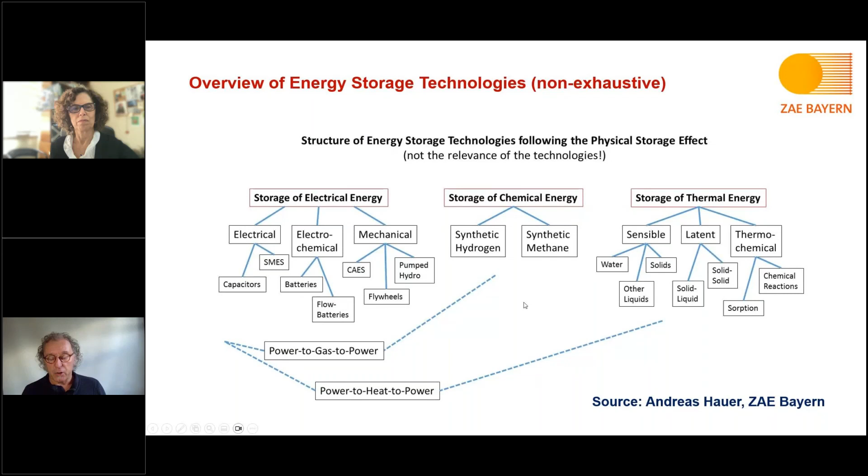Then we have latent heat, in which most of the heat is stored in a phase change. It can be either melting but also evaporation of a substance. Water can be used, so the ice to liquid water transfer has been used widely. And then also organic and inorganic PCMs are on the market for phase change thermal storage.

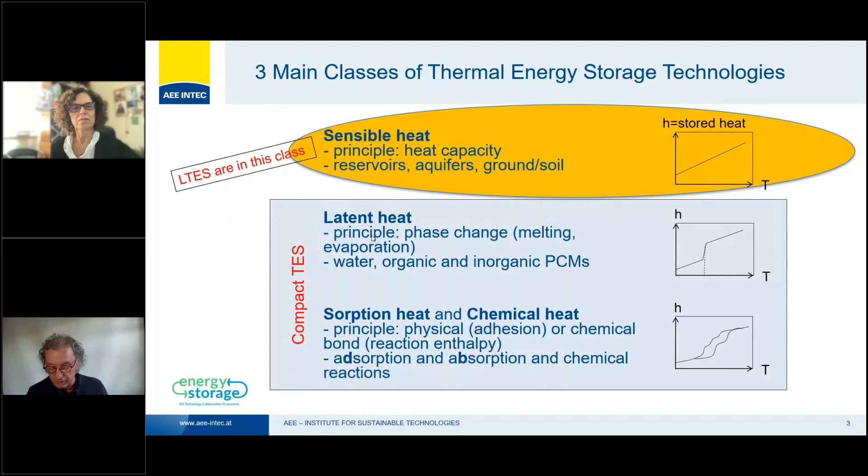The third class is sorption heat and chemical heat. We call it thermochemical materials. It can be either a physical principle in which molecules adhere to a surface or to each other in liquids, or a chemical bond with a chemical reaction or a redox reaction. We call the latter two classes compact thermal energy, but for large thermal energy storages, we will look at the principle of sensible heat. So mostly it will be water or sand that is used for storing heat.

The pit thermal energy storage is a pit, a hole dug in the ground, and then the earth that is dug out of the ground is being used to create the sidewalls. And then everything is topped with an insulating top layer. And then there are inlet and outlet devices to exchange the water with the heat exchanger connected to the system.

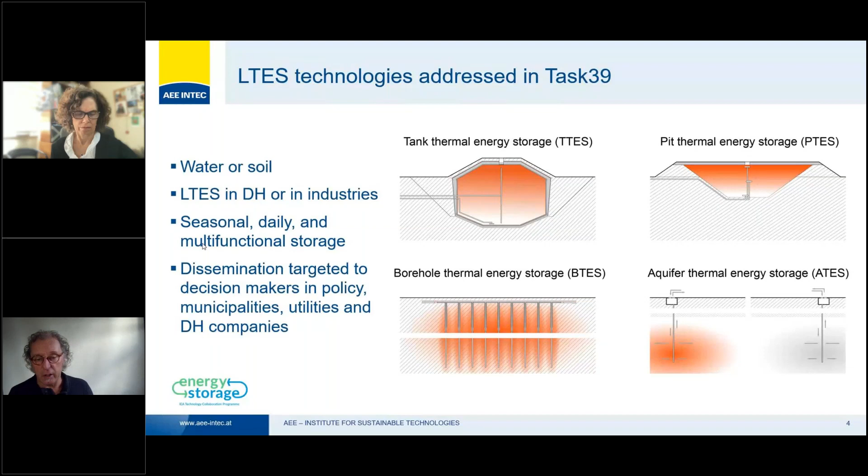What is our definition of large? When talking about large, we talk about 1 gigawatt hour per year, meaning that if you have a seasonal storage, it will be a large storage that has this discharge and charge one time per year. If you have a weekly storage, then it will be a smaller storage, say about 30,000 cubic meters or so, that will discharge 50 times. And another aspect of the scope is that the stored heat should be suited for discharging into district heating networks, so of temperatures between 50 and 100 degrees roughly.

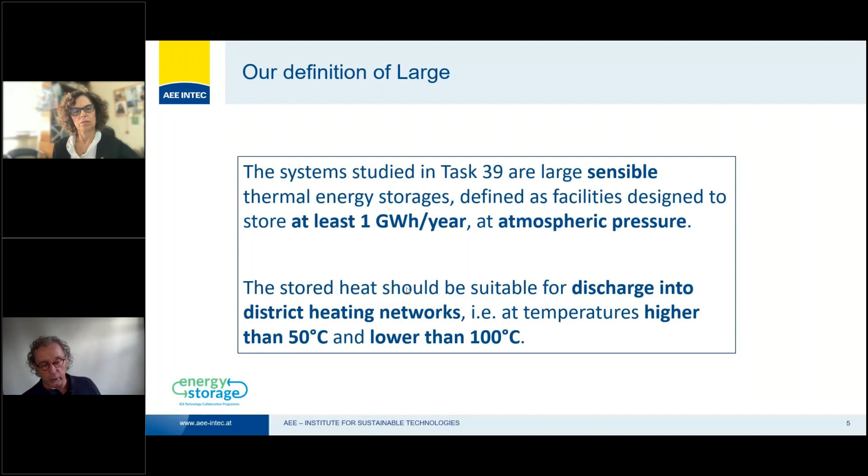Why do we need large thermal energy storages? Because energy storages can provide flexibility, and they enable a large uptake of renewable heat sources, sources that have a great variation throughout the year. Examples of the last two are, for instance, solar thermal heat and deep geothermal heat.

But a large thermal energy storage also can be used for power to heat in times where electricity is very cheap, so that this electricity from wind turbines or PV panels or other renewable sources is stored sustainably in an LTES through a combination of a heat pump or directly. And then, of course, there are other sources for the LTES storage: biomass, CHP, centralized or decentralized, or industrial waste heat, or large heat pump installations in industry.

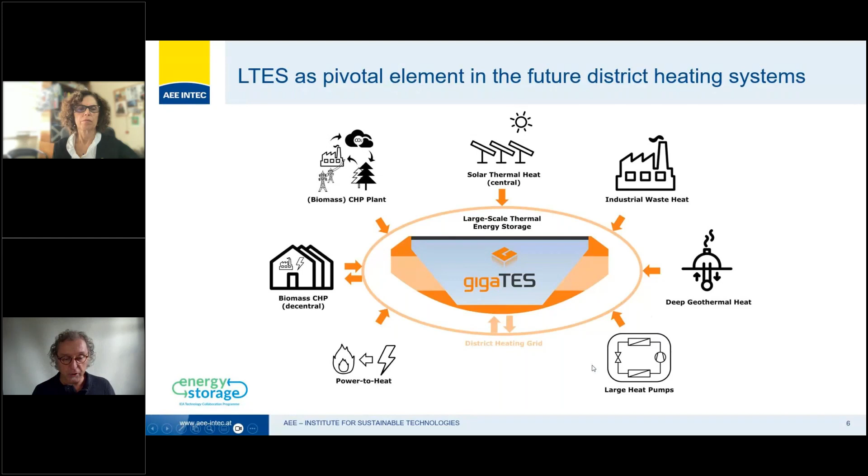What is the potential of pit thermal energy storage for district heating in Europe? For a European project, we did a first estimate of the potential in Europe. The basis for that was that in 2018, there was a total final energy consumption through district heating systems of 446 terawatt hours.

If we assume that 40% of the needed storage technologies are pit thermal energy storage, and that 30% of the annual heat sales should be stored in the storage to be used in winter, for instance, then presently we would need a pit thermal energy storage capacity for district heating of about 54,000 gigawatt hours, meaning 54 terawatt hours.

If we assume that there is a fourfold growth of district heating until 2050, which is also in most of the plans of the national policies, then we would arrive in 2050 at about 220,000 gigawatt hours, meaning that there will be an exponential growth of the pit thermal energy storage systems in Europe. You will see more about this later in the presentation.

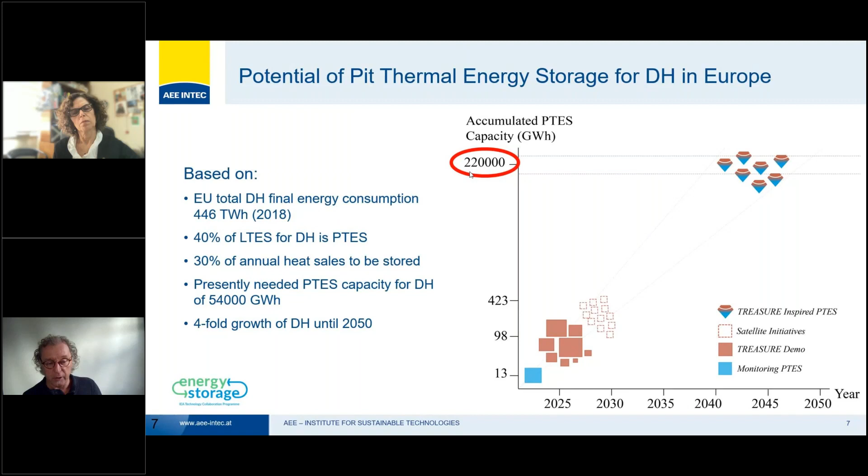So what is working in IEA tasks all about? It's working together with experts all around the world. These experts collaborate on a common work plan. So we have a work plan, and the work is being done by the experts, but all experts have to bring their own funding, meaning that there's no central funding for the projects, but it's decentralized through national or international funding of the experts.

So starting with the work plan, we started the kickoff of Task 39 in October 2020. Then every 6 months we had an expert meeting. Because of COVID, the first 3 were online, and we had a first physical meeting in Graz in 2022. There were 2 meetings that were connected to a technical tour to a pit thermal energy storage installation.

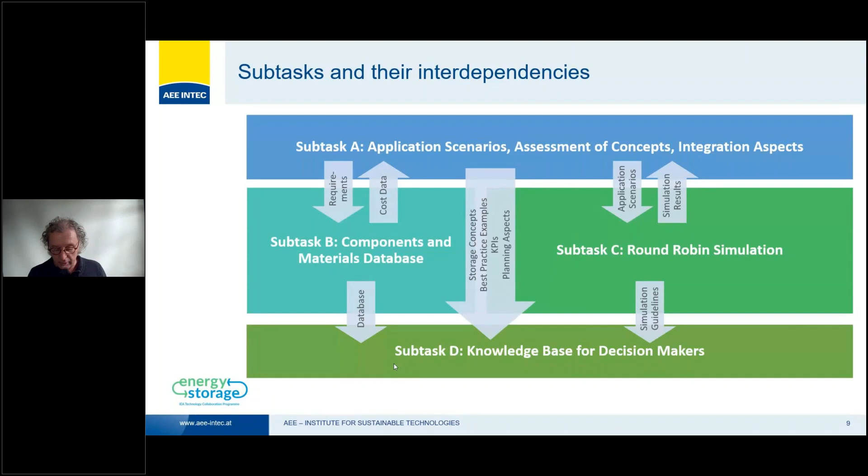In the next 4 slides, you will see some of the results of the task. The task has almost ended, and most of the deliverables will become available in the next month. If we look into subtask A, it's also working on a key performance indicators list. And we define key performance indicators in order to have a better view on the quality and the challenges and barriers connected to different heat storage technologies.

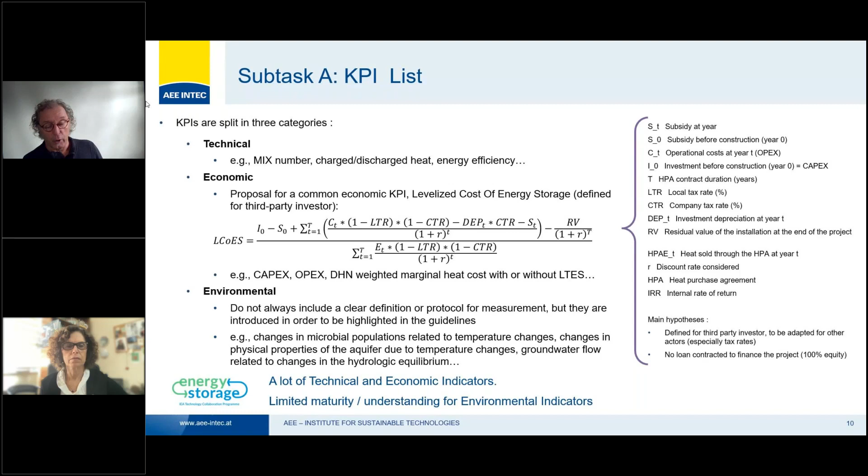We split the KPIs into 3 categories. The first category is the technical one. So for instance, what is the power for charging and discharging? What is the efficiency of the storage over certain periods? What is the exergetic efficiency, for instance, the MIX number, and other technical performance indicators.

Then we also look at economic performance indicators, for instance, the investment cost, the financing cost, but also the levelized cost of energy storage. So what does a kilowatt hour of stored energy cost to the end user? And then, of course, CAPEX, OPEX, and marginal cost are also key performance indicators of the thermal energy storage.

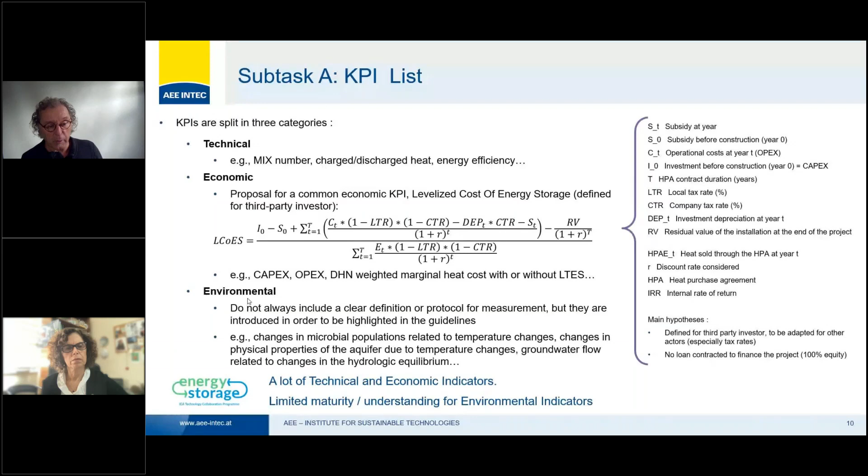And the third category is the environmental performance indicators. But the problem here is that they do not always include a clear definition or a protocol for the measurement. So this is one of the challenges for the group, also for the follow-up, in order to come up with clear protocols on how to define environmental performance indicators.

Then we have subtask B on materials database and material test.

One of the aspects is that we work on a database, and what we have structured now is that we have 3 technologies from which you can select. It's the pit storage, the borehole storage, and the aquifer storage. And from these storages, you can select a component. Here, the example is a component of the pit storage. And these components for the pit storage are either soil, protection, tightness, the water, and the thermal insulation.

And here we chose the soil, and from the soil you can choose the different types of soil. And then from this different type, you can find the different thermal properties or also structural properties of this element. With this, we have a database that will enable engineers to make a proper modeling of the different aspects of a thermal energy storage.

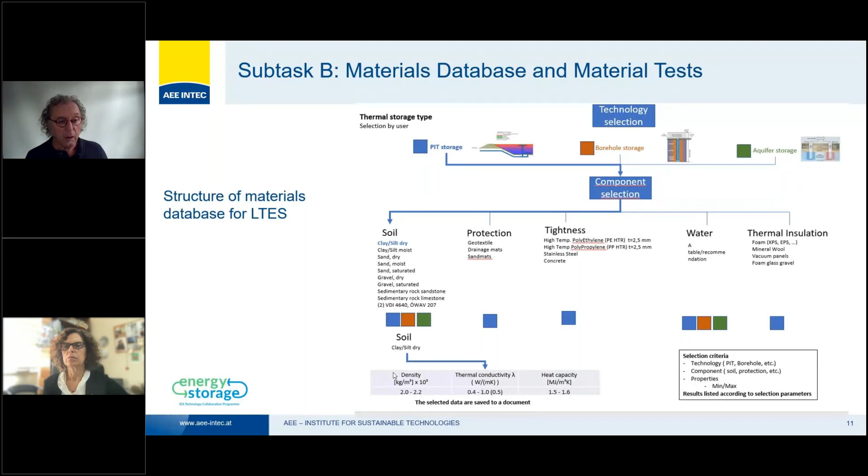Then we have subtask C on round-robin simulation. What we did there is we had a large group of experts that are calculating the performance of large thermal energy storage, and we divided the group into 6 applications. So there's one application for underground tank thermal energy storage with 100,000 cubic meter water volume. The other one is the above ground tank. It's a steel tank with 50,000 cubic meters.

Then there's a pit thermal energy storage with a conical form, and a pit thermal energy storage with a pyramidical form. And then there's one aquifer thermal energy storage and one borehole thermal energy storage. And the idea is that all the experts with their software simulate a year of charging and discharging the storage in a seasonal setting. So 3 months charging, 1 month waiting, and then 3 months discharging. And this is a so-called simplified load profile.

And then the experts compare to each other the results of the calculation and try to find out where the differences come from, and make the protocol of the simulation and the values of the boundary conditions in such a way that the outcomes of the different software are as identical as possible.

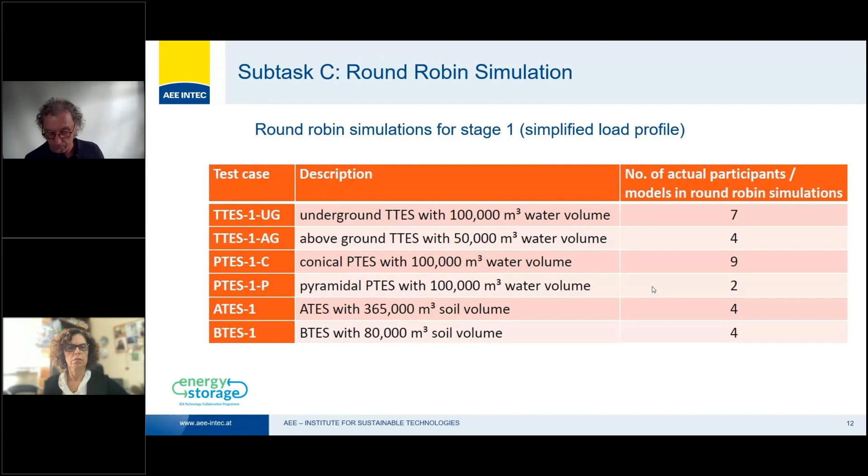Then we have subtask D, working on a knowledge base for decision makers. We introduced leaflets. They are almost ready with information material. You will see more examples of these leaflets soon. And then we have the Task 39 webinar, this one for instance, and we have policy workshops, one on the 5th of December. It will be an online workshop with the question, are large thermal energy storages a key element of the future energy system? The form of the workshop is as follows.

We have a panel of national energy agencies that will give a short introduction of their view on large thermal energy storages, and also the European Commission. And we have Task 39 experts explaining about the technologies and the barriers. And then we have discussion on the different topics, for instance, barriers that need to be resolved in order to enable an uptake of large thermal energy storages in Europe. This could be legislation or permitting procedures or financing.

So let's have a look at some examples of leaflets. The first example is a use case of a tank thermal energy storage. This one is built by Vattenfall in Berlin. It's a 50,000 cubic meter storage. You can see it here by the person standing in the right lower corner of the storage. It's a steel tank, and the steel tank is used to make the district heating network of Berlin more flexible.

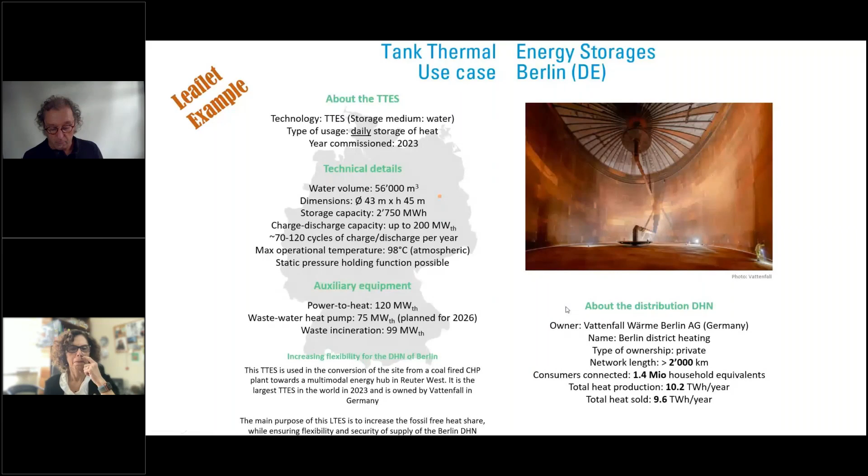Another example is also perhaps very valid and very important for Turkey. It's aquifer thermal energy storage, and in this case it will be applied to a greenhouse. And here the aquifer thermal energy storage is combined with a geothermal well. So on the left you can see the different elements and phases of the aquifer thermal energy storage. So it's drilling, installing the wellheads, then the electrical pumps installation, and then what remains on top is this installation in which the pumps and the pipes are the only thing visible.

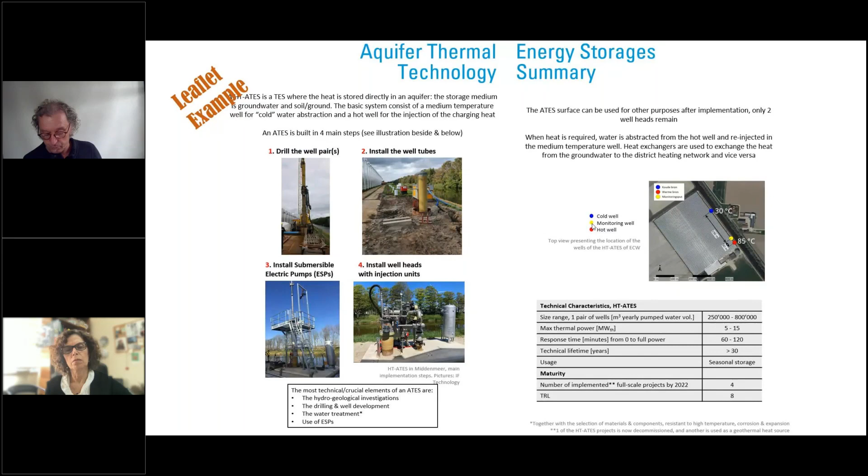Then we have two wells, one cold well and one hot well, and a third well was used for monitoring, because this is a pilot project in the Netherlands in which also some relevant development and research questions have been defined, and therefore the installation is monitored for a number of years. The next slide will show the use case for this one. It's a greenhouse in which peppers are being grown, and the idea is that the heat normally is coming from a very deep geothermal heat well.

It produces heat at 90 degrees centigrade from a depth of 2,400 meters. A geothermal well is only profitable if it is used throughout the year with a constant power. So if there are times in summer that this heat is not needed directly, then the heat is being stored in a high temperature aquifer thermal energy storage. So the combination of geothermal and an aquifer thermal energy storage makes it possible that the geothermal source can provide heat all over the year for this greenhouse.

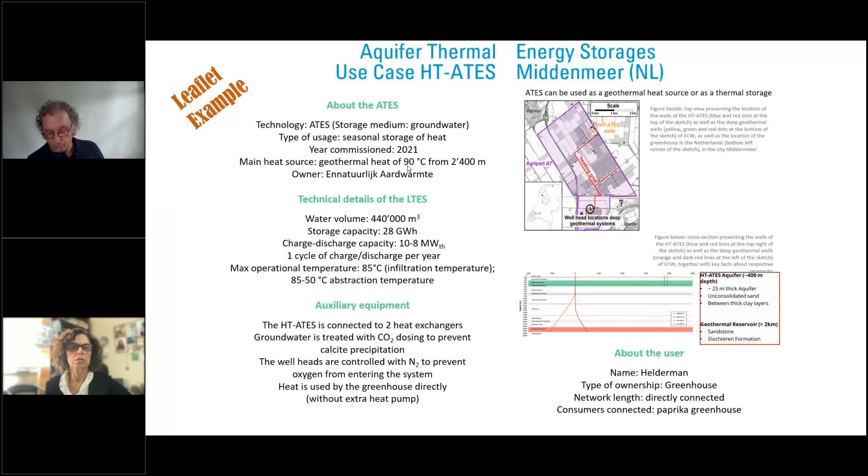So the end, as you heard, of task 39 is at the end of the year. It was a 3-year task, but it will be followed up by the so-called task 45, in which we had a slight change of the focus of the work. The new work will be focused on accelerating the uptake of large thermal energy storages.

And the idea is that because a lot of district heating companies now have the policy of increasing the district heating system and also increasing the renewable sources in order to be less dependent on natural gas, for instance, they need to have a large thermal energy storage. And this is why we, together with different stakeholders, would like to work on bringing down the barriers and the challenges of the market uptake of large thermal energy storages.

The new task will have a 4-year duration and will start 1st of January. And already 22 organizations from 7 countries have indicated that they will collaborate with us in the task 45. And of course, also experts and interested people from Turkey are invited to contact me if they are interested in collaborating.

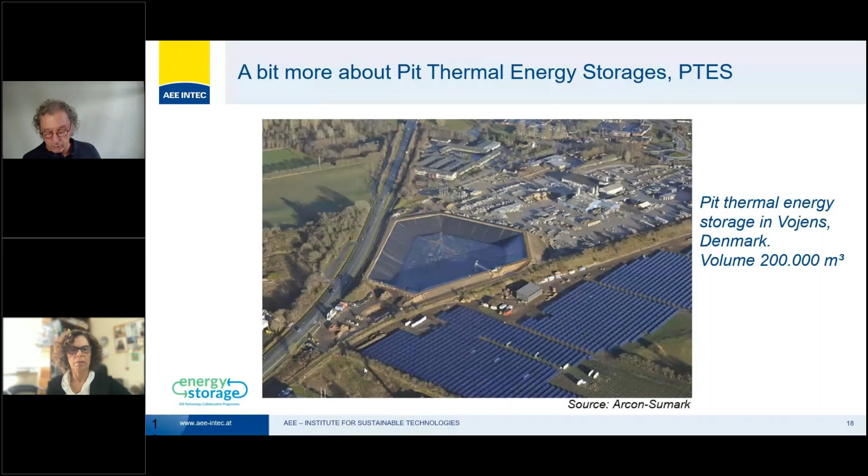Next to the 7 demonstrators, we have 15 satellite initiatives. These are plans for district heating companies that would like to have a pit thermal energy storage, but these are only early plans, and they will have workshops together with the demonstrators in our project in order to accelerate the exchange of information and to bring down the time needed between the first idea and the operation of a pit thermal energy storage.